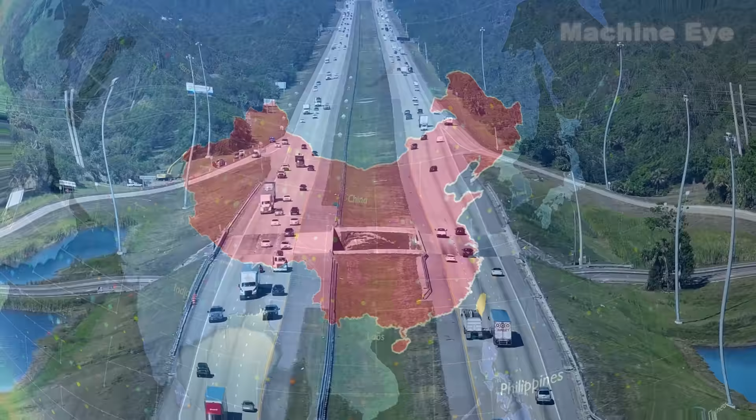In the United States, when people talk about infrastructure, what often comes to mind are icons like the Golden Gate Bridge or the aging yet vital interstate highways that still keep the country moving. But halfway across the world, in China, a different kind of infrastructure story is unfolding, one defined by jaw-dropping speed, sheer scale, and world-shaping ambition. China's engineering achievements are not only transforming the nation's own development map, but also quietly rewriting the rules of global infrastructure. Today, we're taking you deep inside this story to uncover the secrets behind China's rise as a global infrastructure powerhouse, and to witness the extraordinary legacy it's building in steel, stone, and ambition.

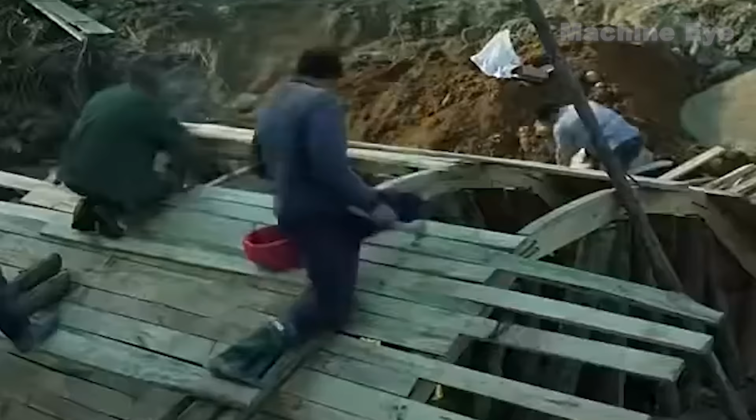When the People's Republic of China was first founded, the country's infrastructure was practically non-existent. The railway network was limited and outdated, with old equipment and low technical standards. Most roads were made of dirt or gravel, and many remote regions weren't connected by any roads at all. Bridge construction lagged far behind, unable to meet even the most basic transportation and economic needs. But the Chinese people have always carried a deep resilience and a determination to build a better future.

While many Western nations remain stuck in debates over whether to renovate or replace aging infrastructure, and often hesitate to take on major projects due to soaring costs and technical complexity, millions of Americans hitting the road will cross bridges and roadways in dire need of improvement and repairs. Getting to your destination likely won't be easy. Expect traffic jams, because decades-old bridges and roads weren't built to handle today's traffic.

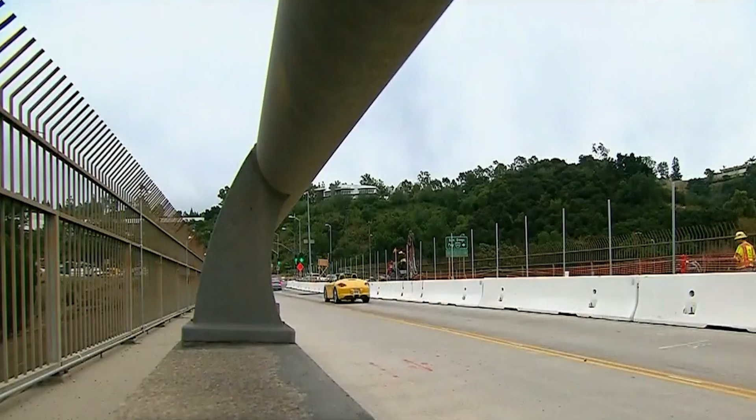The American Society of Civil Engineers once gave the nation's infrastructure a grade of D+. And that's more than just a letter, it's a warning sign for everyday commuters. A looming crisis is quietly unfolding. More than 1 in 9 bridges across the United States has been classified as structurally deficient. Many roads are severely outdated and simply can't handle the overwhelming traffic volumes of today.

Former U.S. Transportation Secretary Anthony Foxx put it bluntly: if we fail to invest in and maintain our aging roads and bridges, the American people will pay a heavy price. It's not just about safety. An estimated 1 million jobs are also at risk.

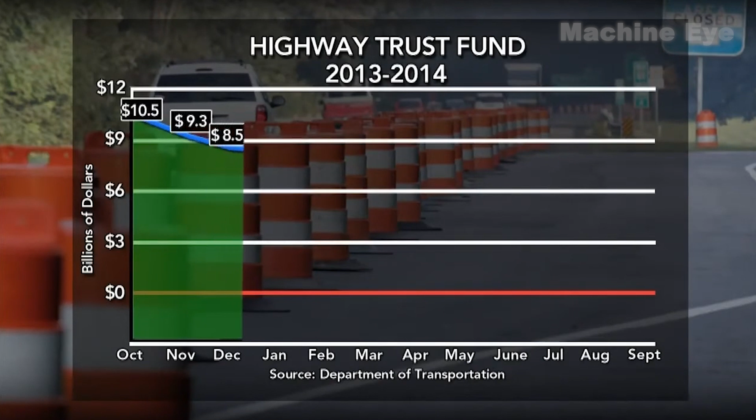Studies reveal a startling economic impact. Traffic congestion alone costs the U.S. over $20 billion annually in wasted fuel. On average, each driver loses more than $8,000 every year, not just in dollars, but in time, productivity, and quality of life. Even more concerning is the Highway Trust Fund, the primary source of funding for transportation infrastructure. It's largely supported by an 18.4 cent per gallon gas tax, a rate that hasn't been adjusted for inflation since 1993.

The result? A critical funding shortfall that's only growing worse by the year. Although the United States is aware of these issues and shows a willingness to improve, it often chooses to maintain the status quo in the face of high renovation costs and complex interest struggles.

While the U.S. struggles to maintain what it once built, China is doing something different. It's moving forward, fast. With astonishing speed and creativity, China is breaking world records again and again, reshaping its economy, its geography, and perhaps even the global balance of development.

This kind of efficiency and innovation was on full display during the 2015 reconstruction of Beijing's Sanyuan Bridge. In Beijing's vast transportation network, Sanyuan Bridge is a critical hub. Built in 1984, it's a diamond-shaped interchange located at a key traffic junction. Every day, it carries an enormous volume of vehicles. At peak hours, up to 13,000 cars pass over the bridge each hour. 48 bus lines run through it, serving an average of 727,000 passengers daily.

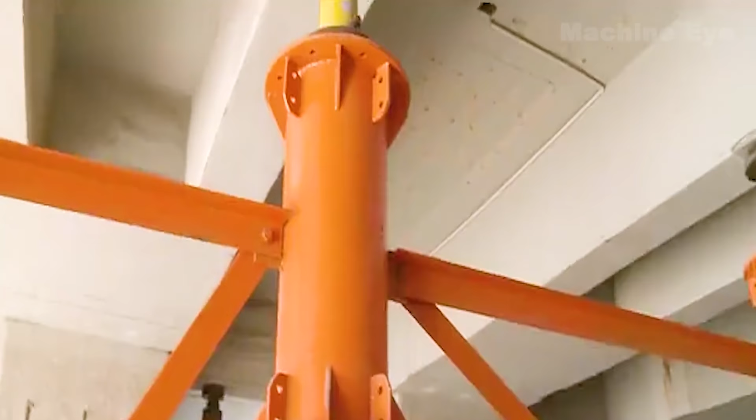After decades of intense use, serious structural problems emerged. The main beams and deck panels had deteriorated significantly, and the bridge's load-bearing capacity dropped to an unsafe level. In 2015, it was classified as structurally deficient. That November, Beijing launched a high-stakes renovation project. Under conventional construction methods, the project could have taken several months, causing major traffic disruption in one of the city's busiest corridors. But Chinese engineers had a different plan.

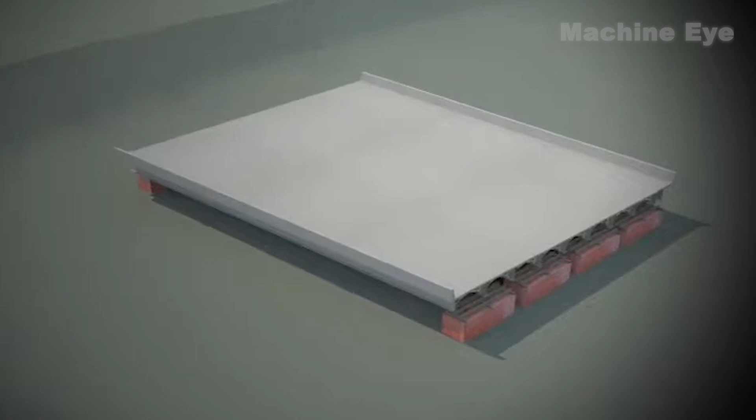They adopted a bold and innovative approach, replacing the bridge deck as a whole using a 1,000-ton integrated transport lifting machine. The old bridge deck, weighing 1,600 tons, had to be removed in 2 massive sections. The new deck, weighing over 1,300 tons, had to be transported and installed with centimeter-level precision.

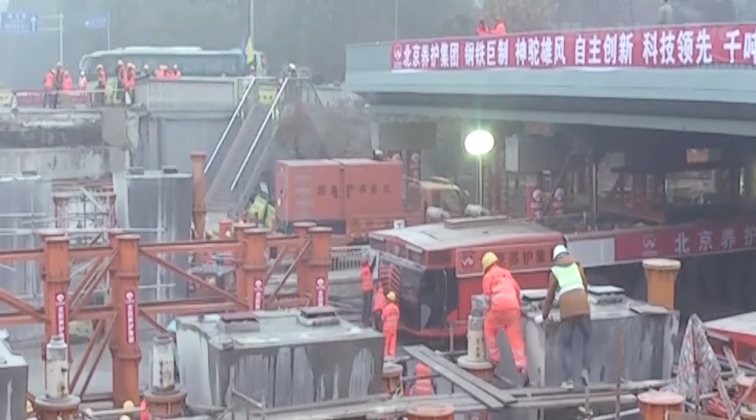The challenges were non-stop. Once work began, engineers found the old bridge in even worse condition than expected. Its concrete was badly damaged and structurally unstable, making safe removal in one piece impossible. The command team quickly switched to a contingency plan: on-site dismantling and segmented transport. Space at the construction site was extremely limited. There were multiple crews, large machines, high-precision demands, and the work had to be done during off-peak hours to avoid shutting down major roads.

Through the tireless efforts of over 1,000 workers operating in shifts, the impossible became reality. The entire reconstruction, from launch to reopening, took just 43 hours.

He said, all this has happened so fast, we haven't yet had time to be astonished. To remind myself how astonished I should be, I occasionally look out the window in my office in Cambridge at this bridge, which goes across the Charles River between the Kennedy School and Harvard Business School. In 2012, the state of Massachusetts said they were going to renovate this bridge.

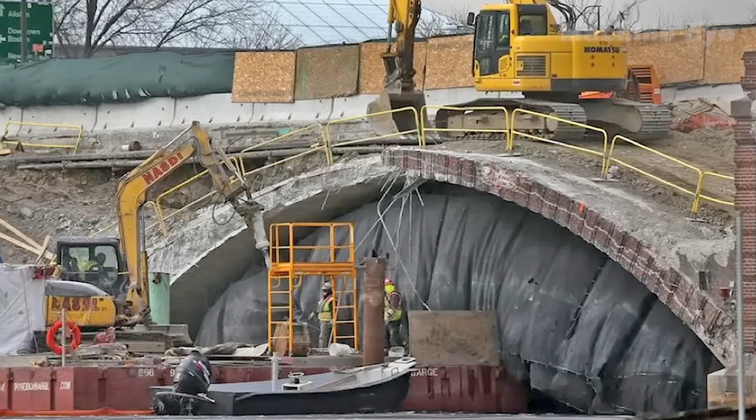It would take 2 years. In 2014, they said it wasn't finished. In 2015, they said it would take 1 more year. Then they said it's not finished. We're not going to tell you when it's going to be finished. Finally, last year, it was finished, 3 times over budget. Now, compare this to a similar bridge that I drove across last month in Beijing.

It's called the Sanyuan Bridge. In 2015, the Chinese decided they wanted to renovate that bridge. It actually has twice as many lanes of traffic. How long did it take for them to complete the project? What do you bet? Take a guess. Okay, take a look.

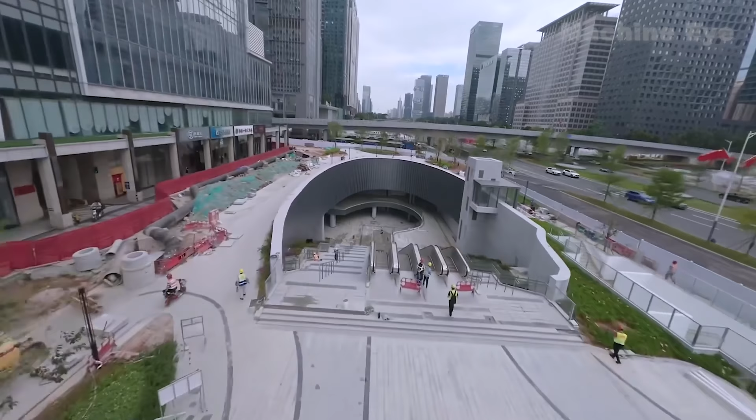From the artistic murals lining the transfer corridors to the smart navigation kiosks scattered throughout the stations, everything feels thoughtfully designed and incredibly user-friendly. Now follow my lens, and let's explore some of the most beautiful subway stations in China.

Then I flew back to New York, and reality hit me like a cold slap. The subway platforms here reek of mold and a strange mix of garbage and stale air. I've seen rats, I've seen old garbage, I've seen all types of stuff in the subway. I would say the grossest thing I've seen on subways is definitely human feces. The walls are covered in peeling paint and faded graffiti that look like they've been there for decades.

Rust-covered tracks are practically a highway for rats, and leaking ceilings drip steadily onto the already grimy floors. Inside the train cars, the seats are cracked and frayed, the windows spiderwebbed with scratches, and in the summer it feels like a sauna, while winter turns every ride into a freezing ordeal. No wonder people joke that New York's subway is a living historical artifact, while China's subway system is already racing toward the future.

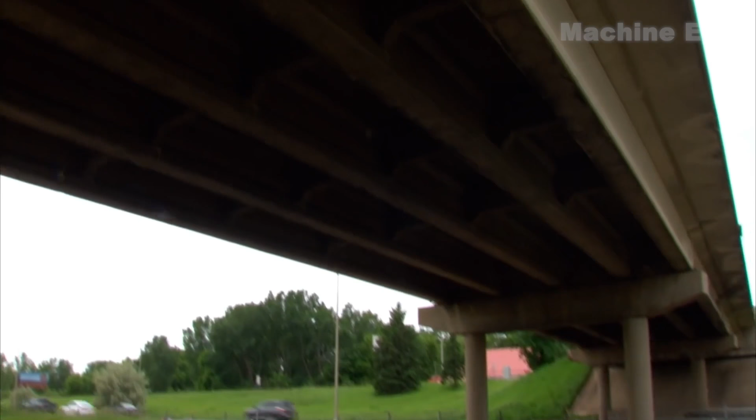This isn't an isolated case. Across the US, road conditions are in decline. According to the American Society of Civil Engineers, more than 40% of highways nationwide are rated as poor or merely mediocre. Aging roads have also led to increasing traffic congestion, adding an average of 54 extra commuting hours per year for American workers. The United States' performance in bridge infrastructure is also deeply concerning.

In March 2024, the Francis Scott Key Bridge in Baltimore, Maryland, collapsed after being struck by a ship. This bridge, built in 1977, was nearing the 50-year design lifespan typical of most bridges in the United States. According to a 2021 report by the American Society of Civil Engineers, approximately 42% of U.S. bridges have been in service for over 50 years, and around 12% are 80 years old or more, posing significant safety risks due to aging infrastructure.

In contrast, China's 43-hour bridge swap at Beijing's Sanyuan Bridge stands as a feat of engineering and efficiency. While the U.S. was once a global leader in infrastructure, it now faces chronic underfunding, lengthy decision-making processes, and strained local budgets, all of which hamper progress.

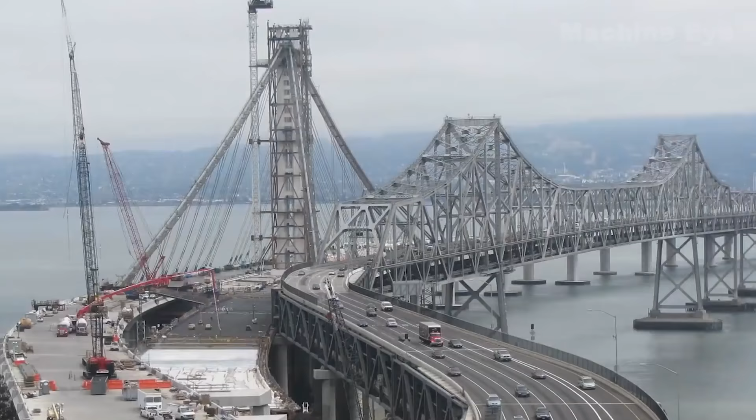In an attempt to reverse the decline of America's infrastructure, former President Biden signed the Infrastructure Investment and Jobs Act at the White House, hoping to revitalize the nation's infrastructure through this initiative.

Across our country right now, there are 45,000 bridges that are in poor condition. We're seeing photos of some of them behind me in all 50 states, and I've had a chance to see some of them myself as I've traveled the country. But about two-thirds of the bridges in need of repair in this country are considered off-system because they're not directly connected to the interstate highway system.

These are the bridges that are often overlooked when decisions are being made, but they are essential for small towns, rural towns, farmers to get their products to market, small businesses to be able to serve customers. These are the bridges that, when they're closed, shut off deliveries and routes to school, work, and home. They create longer delays for first responders when every second counts.

So we've included $27.5 billion for smaller bridges, including dedicated funding for those off-system bridges I just described. And because maintaining these bridges is often the responsibility of counties or towns whose budgets are stretched thin already, we decided to get rid of the requirement that counties or towns share in the cost. The federal government is going to pay for 100% of the cost for repairing these small bridges.

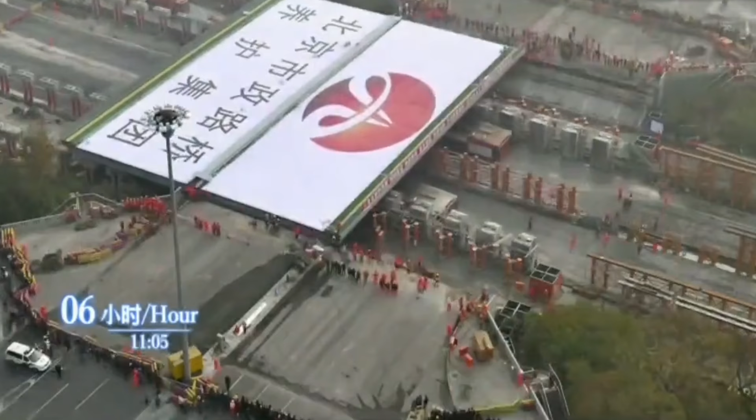America's golden era of infrastructure is fading into the past, while China charges forward, drawing a sharp and undeniable contrast. The Sanyuan Bridge project became more than just a construction story. It was a showcase of Chinese engineering skill, the power of Chinese speed and precision, and a statement to the world. When it comes to infrastructure, China isn't just catching up, it's setting the pace.

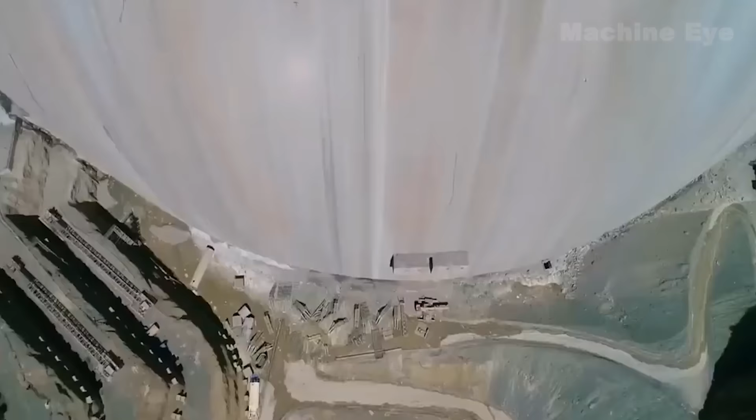From the world's largest high-speed rail network, spanning over 42,000 kilometers, to the record-breaking Hong Kong-Zhuhai-Macau Bridge that links three major cities across the sea. From the Sichuan-Tibet Railway cutting through the treacherous Hengduan Mountains, to the breathtaking Beijing-Daxing International Airport with its Phoenix-inspired design. Through sheer ambition and engineering excellence, China has redefined what it means to be an infrastructure giant.

Now, another monumental project is steadily advancing: the Pinglu Canal. This colossal undertaking is ushering in a new era of construction and national development on an unprecedented scale. In the towering mountains of southwestern China, engineers are carving a massive 135-kilometer canal, cutting straight through rugged terrain to give landlocked cities in Guangxi direct waterway access to the South China Sea. This isn't just about digging a ditch. This is a bold gamble to reshape the region's economic lifeline.

It's called the Pinglu Canal, and it's being hailed as the artery of the century. Right now, it's turning this once unthinkable plan into reality. The scale of excavation is nothing short of staggering.

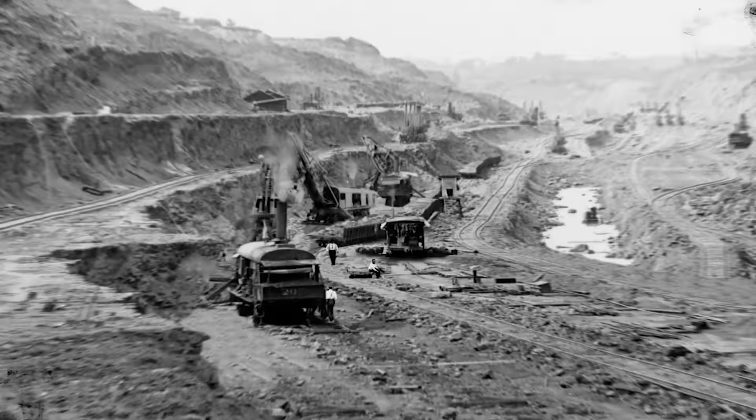Over 340 million cubic meters of earth and rock are being moved, the equivalent of shaving down entire mountain ranges. That's 3 times the excavation volume of the Panama Canal. At one of the most challenging sections, the Madao watershed, engineers are dealing with a 30-meter elevation difference, blasting through rock and flattening channels like performing surgery on the earth itself.

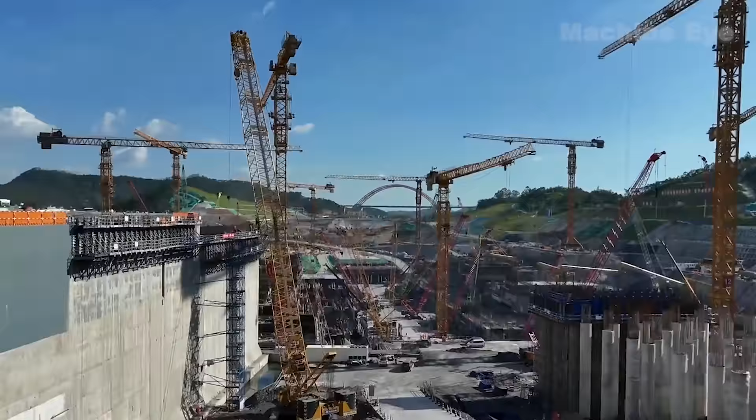But once they confirmed it was a real project, the tone changed. 'This is master-class engineering. This is how you make a nation great, not by slogans, but by building something that speaks for itself.' A German viewer marveled, 'I'm speechless. Where is this exactly? I'd love to visit someday.'

When people learned that the canal is expected to be completed by 2026, the comment sections lit up with comparisons. An Australian joked, 'This would take us about 400 years to finish down here.' And an American chimed in, 'On a construction site here, we have 20 workers. 1 works and 19 supervise.'

The contrast with China's construction efficiency couldn't be more stark. A Dutch hydraulic engineer named Jan commented, 'Coming from a country that has lived with water all its life, I've never seen something this wild and precise at the same time.'

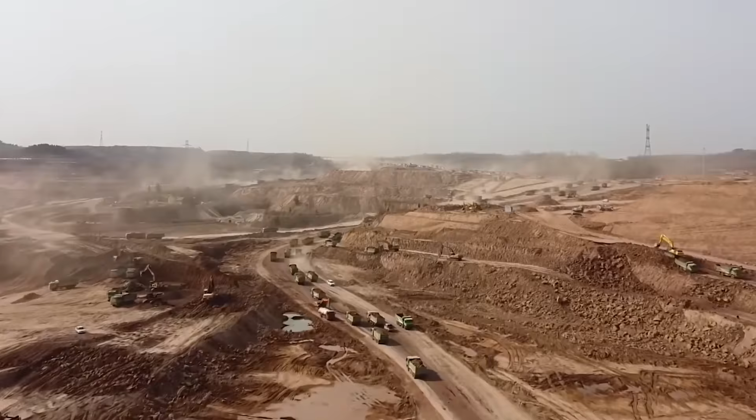Meanwhile, a US viewer wrote, 'Our infrastructure proposals are still stuck in Congress. China's out here slicing the continent in half with a canal. I surrender. That's execution.' If the Pinglu Canal is China's way of rewriting legends into the land, then the Sichuan-Tibet Railway is about challenging the limits of engineering on the rooftop of the world.

Spanning 1838 kilometers and reaching altitudes of up to 4,400 meters, the railway must cross 14 seismic fault lines, making it one of the most difficult rail projects ever attempted on Earth.

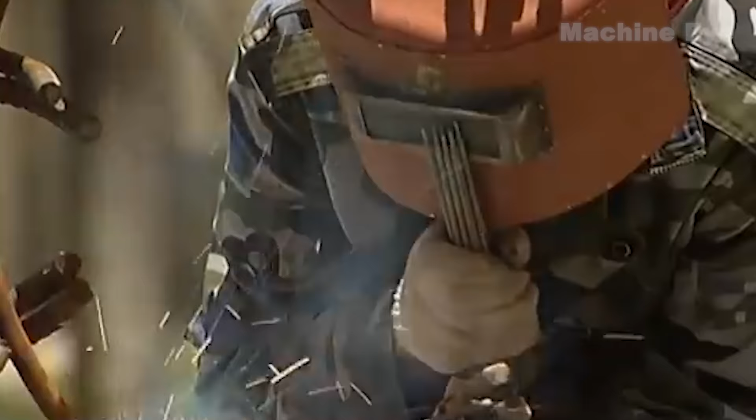To solve the challenges of building on permafrost in high-altitude regions, Chinese engineers developed an innovative thermal siphon cooling system. By harnessing the principle of ammonia's thermal expansion and contraction, the system draws underground heat away, keeping the frozen soil layer stable. For bridge construction in these harsh environments, they use lightweight alpine steel structures that are 30% lighter than traditional steel, yet strong enough to withstand Category 12 winds and magnitude 8 earthquakes.

During the construction of the Erlang Mountain Tunnel, workers wore oxygen tanks on their backs and used pneumatic drills to chip away at the solid rock, inch by inch, enduring temperatures as low as -20 degrees Celsius. They went on to set a world record, advancing 350 meters in a single month under such extreme conditions.

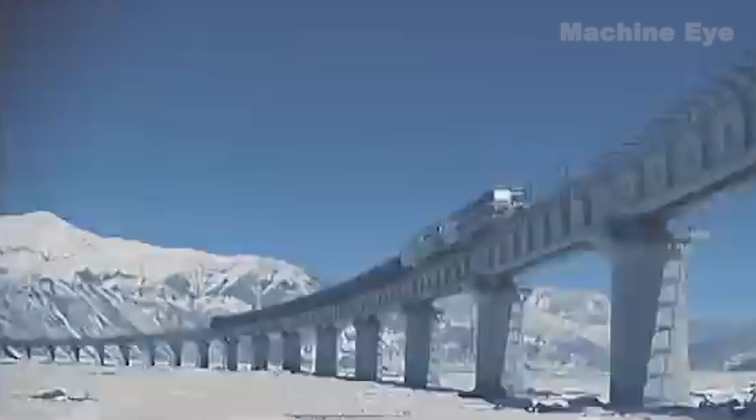The completion of the Sichuan-Tibet Railway will dramatically improve connectivity between Tibet and the rest of China, boosting economic development, cultural exchange, and helping lift communities along the road out of poverty. Railway enthusiasts across the West have praised it as a monumental victory of mankind over nature. Some even called it a miracle built in one of the most impossible environments on Earth.

However, certain Western media outlets and commentators have painted a different picture. Some labeled the railway one of the most expensive projects in the world, implying that China is overspending to show off. Others linked it to the 100th anniversary of the Communist Party, calling it a lavish political gift. There have even been rumors claiming the railway will destroy local traditions by flooding the region with tourists, or that the Chinese military might use it to threaten neighboring countries. But these claims are baseless, rooted in prejudice and jealousy, not facts.

Throughout the long and storied history of human engineering, tales of pain and sacrifice have never been absent.

In the 1930s, during the construction of the Hoover Dam in the United States, 120 lives were lost to the cold grip of concrete, and countless more were injured. At the Panama Canal, tens of thousands of workers perished, 30,000 men, claimed by the deadly combination of tropical disease and grueling labor under the sweltering jungle heat.

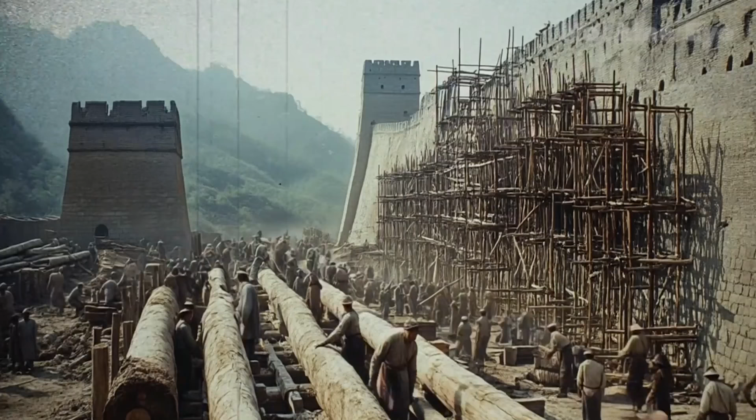Looking further back, China's Great Wall, winding across the mountains for thousands of miles, was built atop an immeasurable human cost. Buried beneath the earth and stone are the silent remains of those who gave their lives, whispering stories of suffering beneath each brick and battlement.

But with time, the meaning of engineering has evolved. In modern-day China, the principle of people first, life above all, has become central to every project. Every life is treated as invaluable.

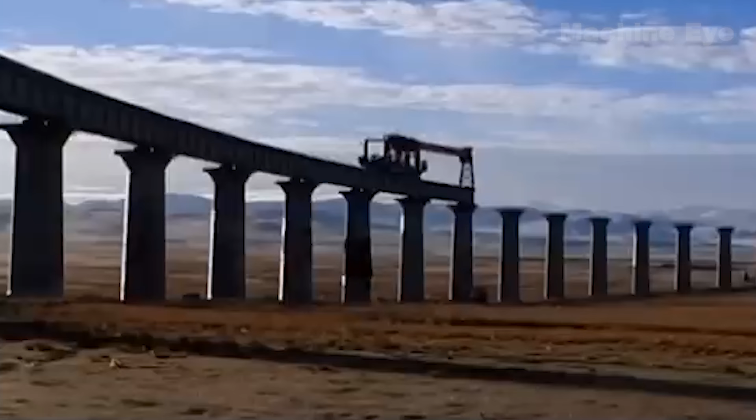This deep respect for human life was fully embodied in the construction of the Qinghai-Tibet Railway, the world's highest altitude rail line, built across the Tibetan Plateau at an average elevation of 4,000 meters. As soon as construction began on this sky road, it presented an unprecedented challenge to the nation's medical and safety systems. In this forbidden zone of life, where thin air and sub-zero temperatures can silently claim a life within moments, even a single breath carried potential danger.

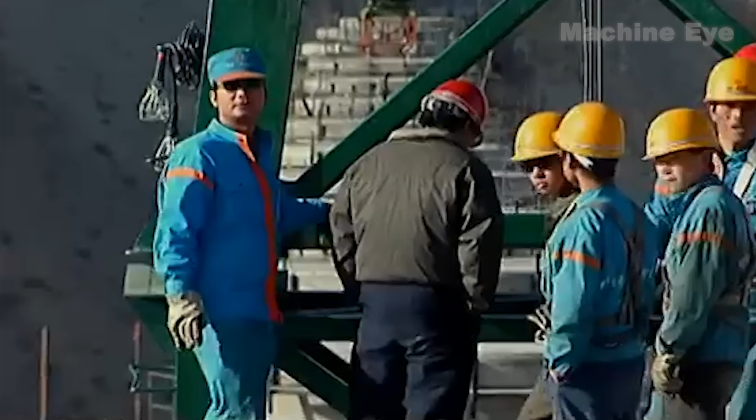But Chinese builders did not choose to push forward at the cost of lives. Instead, they drew a line of defense with science, planning, and care. On a site with over 200,000 workers, medical teams were stationed throughout every stage of the project. Portable oxygen generators, mobile treatment units, regular health checkups, and emergency response systems were deployed to every work zone. Every protocol reflected a commitment to life, every detail a testament to the value placed on human dignity.

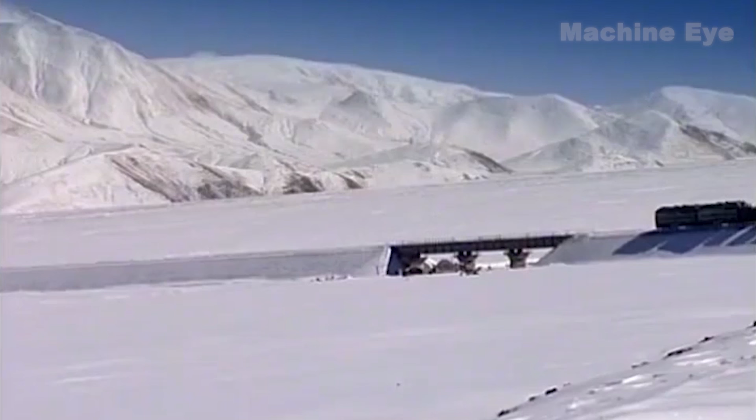In the end, China not only conquered 3 world-class engineering challenges, permafrost, extreme altitude, and fragile ecosystems, but also achieved a miracle in safety: 0 deaths from altitude sickness. This wasn't just a victory for engineering. It was a living demonstration of a core belief that no achievement is worth more than a single human life, and that even in the pursuit of national development, China will never compromise on protecting its people.

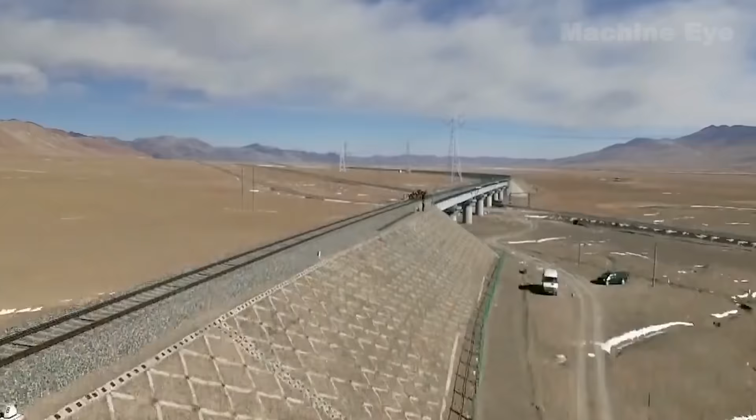The construction of the Qinghai-Tibet Railway is widely regarded as one of the greatest feats in the history of global railway engineering. However, during its development, some Western media outlets went to great lengths to exaggerate claims of casualties during the project, attempting to distort the true meaning and significance behind China's efforts in building this monumental railway. Their coverage was often laced with sarcasm and suspicion, as if struggling to accept that China had managed to complete a project of such extreme technical and geographical difficulty.

Some foreign netizens also echoed false narratives. One South Korean commenter even claimed that if Korea had built this railway, it would have taken half the time, while also alleging that over 3,000 workers died from altitude sickness. But the truth tells a very different story.

During the first phase of the Qinghai-Tibet Railway, it's true that China faced harsh environmental conditions and lacked the advanced resources we have today. According to official data, 179 workers lost their lives, and 633 were injured during this early stage, when engineers had to battle severe permafrost, high altitude, and extreme weather with limited technology.

But by the time construction of the second phase began in 2001, the situation had changed dramatically. China's financial, technical, and medical capabilities had all improved significantly. Participating construction firms implemented comprehensive health and safety systems to protect every worker involved.

Dr. John West, Vice President of the International Society for High Altitude Medicine, described the Golmud Lhasa section of the railway as one of the most challenging high-altitude projects ever built, comparable, in his words, to the Great Wall of China in the sky.

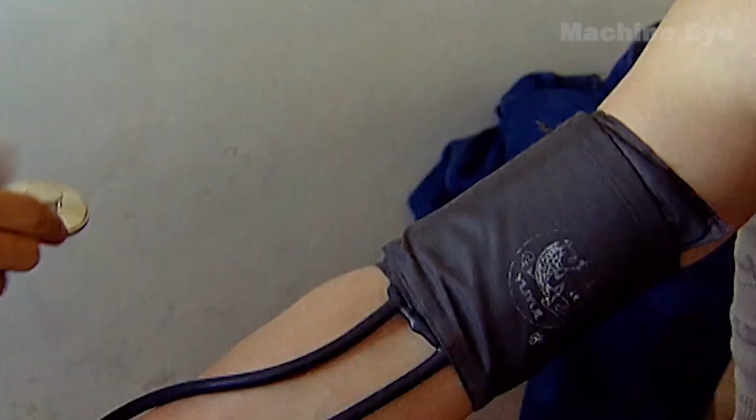China invested heavily in studying and treating acute and chronic altitude sickness, building a full medical infrastructure around the project. They promoted on-site emergency care protocols, which dramatically reduced the incidence of deadly conditions such as high-altitude cerebral edema and pulmonary edema. Over 5 years of continuous construction, more than 100,000 workers took part in building the railway, and not a single life was lost due to altitude-related illness.

This shocked even Western medical experts. A Chinese Academy of Engineering academician later pointed out, when the project reached elevations above 4,500 meters, we had 14,000 people working, and not a single death from hypoxia. Ironically, over 100 fatalities occurred due to car tire blowouts, not from altitude.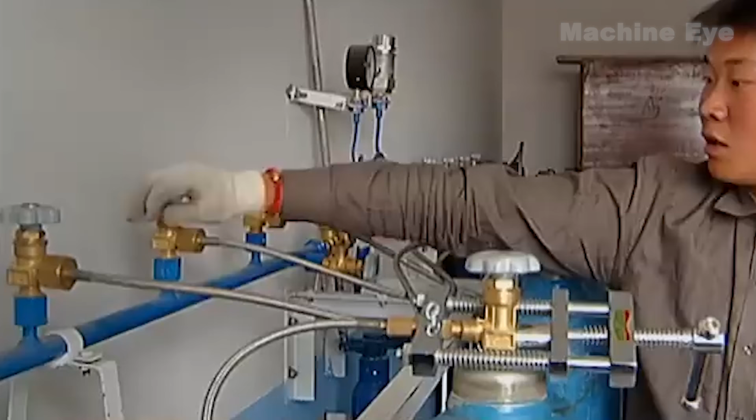To fight oxygen deprivation, construction teams deployed everything, from personal oxygen bags, to cylinders, to oxygen generation stations, and even hyperbaric chambers. Over the 5 years of Phase 2 construction, workers used up 600,000 oxygen tanks, a powerful symbol of how science and compassion came together to protect lives. The Qinghai-Tibet Railway was not just an engineering triumph.

It was a triumph of will, science, and deep respect for life. Those who try to discredit it with false claims are quickly silenced by the facts. This railway has become more than just a symbol of China's infrastructure strength. It represents humanity's victory in confronting the limits of nature without sacrificing human dignity.

Still, some Western media continue to label the project as a political stunt. They claim it was built merely to elevate China's leadership image, ignoring the deeper purpose behind it: to promote regional development, connect remote areas, and foster national unity. In one article, the New York Times argued that the railway would accelerate Han-led economic development in Tibet and claimed it would choke the region's ancient spiritual civilization. They even warned that the railway might further accelerate the migration of Han Chinese into Tibet, calling it a tool

for state control. Some Western media even went so far as to claim that the Qinghai-Tibet Railway threatens the very existence of Tibetan and Buddhist culture. Tibetans' unique way of life will disappear. That was their warning. But what do you think?

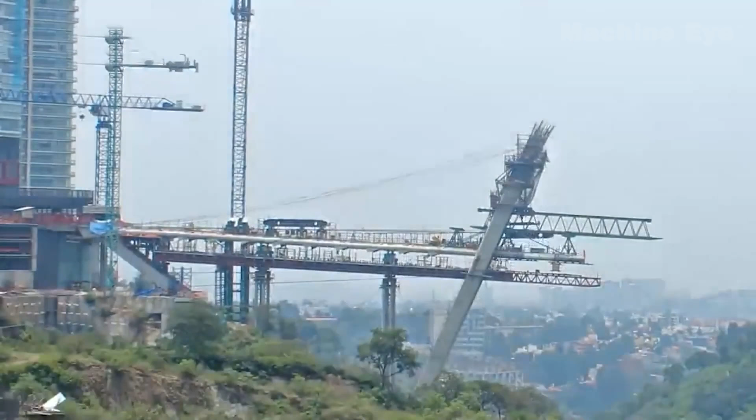Meanwhile, across the Pacific, China is rewriting the rules of infrastructure. In 2023 alone, over 10,000 bridges were built or rebuilt, some of them world-class megastructures that span entire seas.

The contrast in transportation infrastructure is even more striking. In New York City, the subway averages just 16 km/h, and delays caused by aging equipment are a daily occurrence. Meanwhile, China's high-speed rail network races ahead at 356 km/h, with a total length exceeding 45,000 kilometers, accounting for more than 70% of the world's high-speed rail mileage.

Take California's high-speed rail as an example. After 15 years of planning and debate, only a 190-kilometer stretch has been completed, with costs ballooning from $33 billion to over $128 billion. In contrast, China builds comparable rail lines in 40% less time and at 30% lower cost, without compromising quality or safety.

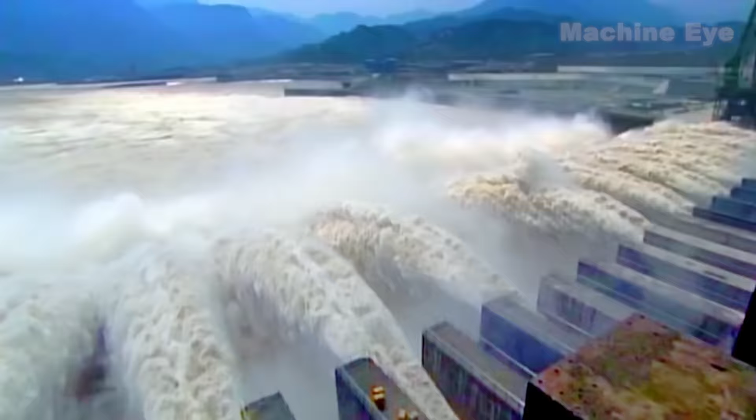The gap is just as visible in energy infrastructure. In parts of the U.S., aging power grids struggle to withstand extreme weather, often resulting in widespread blackouts. Meanwhile, China has built the world's largest clean energy system. Just one facility, the Baihetan Hydropower Station, can supply electricity to over 40 million households.

While the U.S. is still debating pipeline repairs, China has already completed thousands of kilometers of natural gas and oil pipelines, meeting the world's highest technical and construction standards. Behind these numbers lies a fundamental difference in development models. In the U.S., infrastructure projects often stall amid lengthy approval processes and political gridlock. In China, powerful coordination, homegrown engineering innovation, and a long-term vision turn blueprints into reality at scale and speed.

Want to know how these engineering miracles come to life? Let's dive into the construction front lines of some of China's most awe-inspiring projects, like the Deep Earth Take 1, the Shenjiang High-Speed Railway Tunnel, and the Changtai Yangtze River Bridge, and see what the future of infrastructure really looks like.

In today's global infrastructure landscape, China is redefining what's possible, building at a speed and scale that is simply breathtaking. While many nations struggle to repair or upgrade aging infrastructure, China has launched a sweeping infrastructure revolution, reshaping geography and transforming lives through one mega project after another.

In the remote Tarim Basin of Xinjiang, the roar of drilling machines never stops at the Deep Earth Taklamakan 1 well. This is no ordinary project. It's a direct challenge to the Earth's limits.

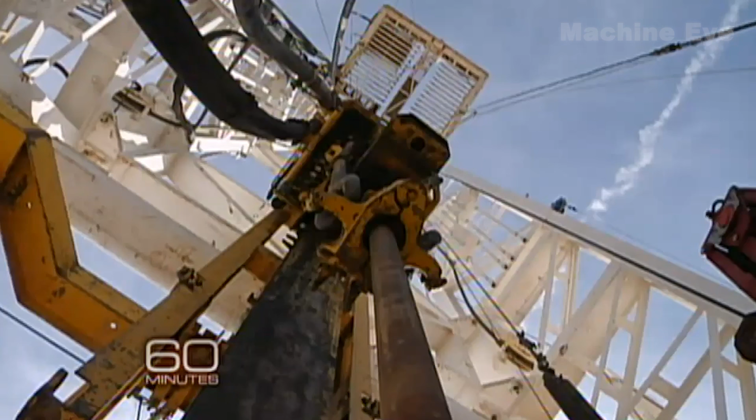While shale gas drilling in the United States hovers around 3,000 meters, Chinese engineers, using an entirely domestically developed automated rig, have pushed the drill bit to a staggering 10,910 meters below ground. This makes the Taklamakan 1 well the deepest in Asia and the second deepest scientific borehole in the world. It also marks a historic breakthrough in China's deep earth exploration capabilities.

Engineers faced extreme heat, pressure, and complex geological formations, yet they overcame these with relentless innovation. Every meter drilled pushed the boundaries of what humans can achieve.

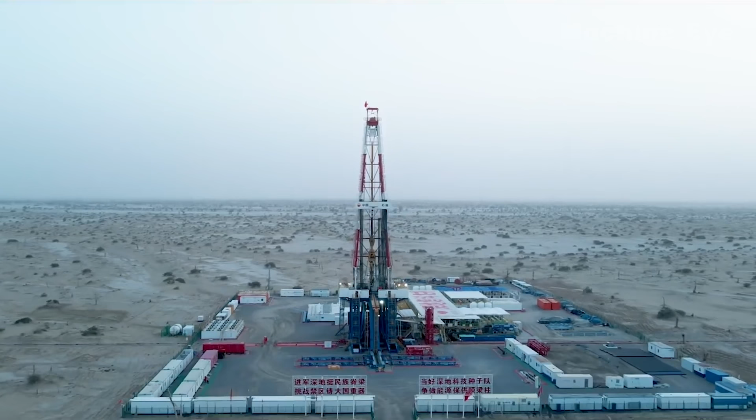It is said that after drilling 9,000 meters underground at the Deep Earth Take 1 well, Chinese engineers broke through rock layers that date back 500 million years. They then converted seismic waveforms from 9,000 to 14,000 meters below the surface into audible frequencies, allowing us to hear the sounds from deep within the Earth.

Meanwhile, under the Pearl River estuary, the construction of the Shenjiang High-Speed Railway Tunnel is just as intense. At a depth of 106 meters beneath the seabed, the massive Shenjiang tunnel boring machine is advancing at a steady 15 meters per day. This project has already broken records, becoming the deepest shield tunneling project in the world for high-speed rail.

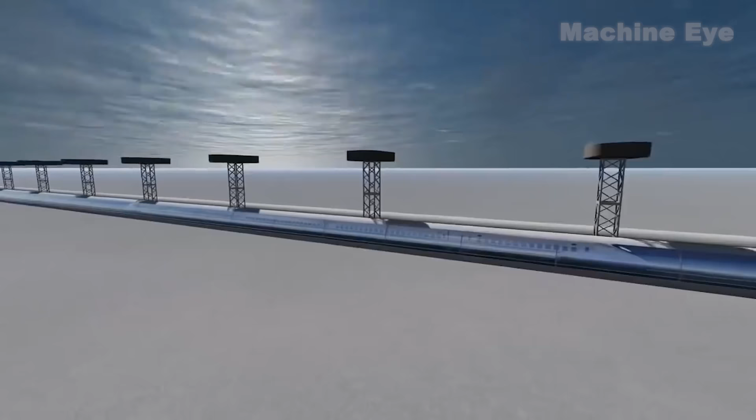While New York's century-old subway tunnels often experience delays due to aging infrastructure, China has reached a 100% localization rate for TBM technology. From design and manufacturing to deployment, every step is domestically driven.

This tunnel not only broke depth records, but also set 5 global engineering benchmarks, including breakthroughs in cable imaging and tailpipe grouting. These advances have significantly improved construction efficiency, safety, and reliability. Even the New York Times couldn't help but express amazement.

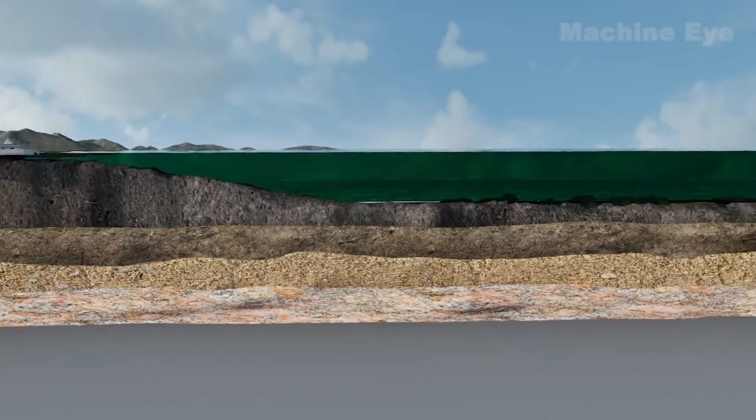In the Pearl River estuary, Chinese engineers connected 6.7 kilometers of undersea tunnel segments with a margin of error of just 3 millimeters, like assembling Lego blocks in the middle of the Pacific Ocean. Meanwhile, Boston's Big Dig overran its budget by 220% and resulted in a fatal ceiling collapse.

Now shift your view to the Yangtze River, where the Changtai-Yangtze River Bridge is rewriting engineering history. Its 350-meter-tall cable-stayed tower, equal to a 115-story building, is now the tallest of its kind in the world. But it's not just the height that impresses.

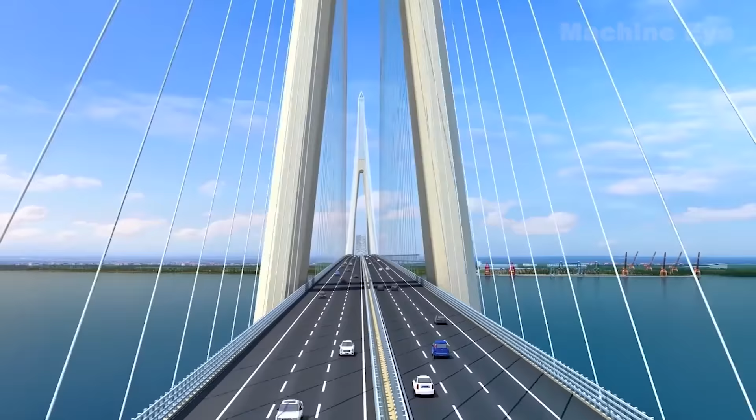The bridge's innovative flat-deck design integrates high-speed rail, expressways, and local roads all on a single level, maximizing efficiency and minimizing land use. The main waterway bridge of this river-crossing channel is a cable-stayed bridge with a main span of 1,208 meters.

While both Tianxingzhou Channel Bridge and Luzhou Channel Bridge use a steel truss arch bridge with a main span of 388 meters. Its average area is approximately 5,400 square meters, which is the size of 13 basketball courts.

The underwater foundation for the tower piers of the bridge uses 23,000 tons of steel. That's the steel of 3 Eiffel Towers.

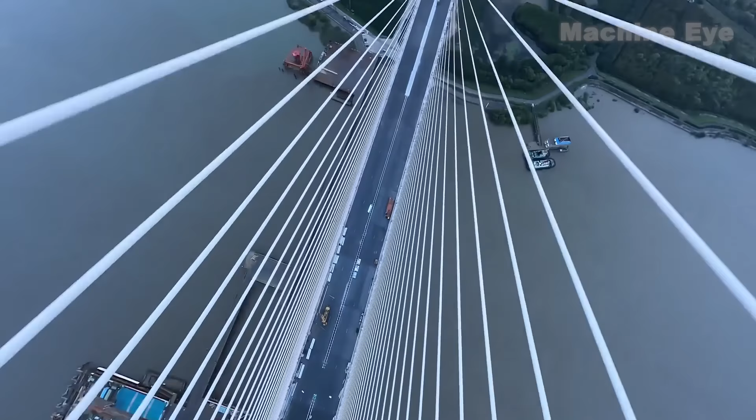Engineers faced enormous challenges, such as maintaining vertical precision for ultra-tall towers and hoisting enormous steel beams across vast spans. Yet, through cutting-edge techniques and bold innovation, these obstacles were conquered.

In stark contrast, California's high-speed rail project remains mired in cost overruns and technical delays. China, by comparison, is completing similar projects 40% faster and at 30% less cost, thanks to its powerful industrial base, streamlined coordination, and decades of accumulated engineering expertise.

But these mega projects are just part of the picture. China's infrastructure miracle is also evident in its expanding transportation network. As of today, China's high-speed rail network has surpassed 25,000 miles, more than 70% of the global total.

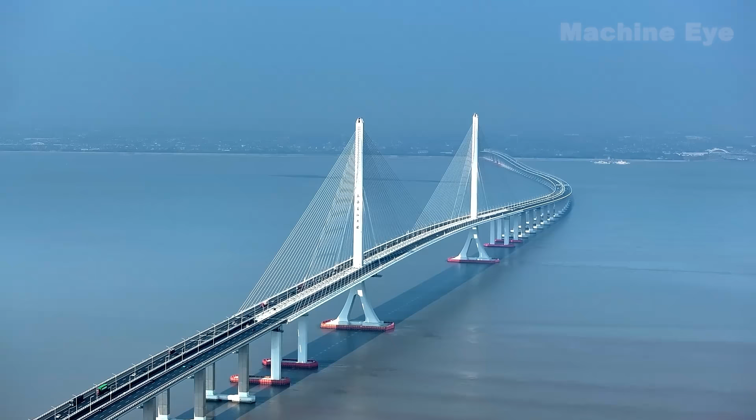From the icy plains of Harbin to the tropical shores of Sanya, from coastal megacities like Shanghai to the high-altitude plateau of Lhasa, this network crisscrosses the country like a web of steel dragons, uniting cities and boosting regional economies. These rail lines have dramatically reduced travel times and improved quality of life, while also driving regional economic integration.

Throughout the process, engineers have tackled an array of extreme challenges: Arctic cold, searing heat, fragile ecosystems, deserts, and more. For example, the Qinghai-Tibet Railway posed 3 world-class challenges: high-altitude hypoxia, permafrost, and environmental fragility.

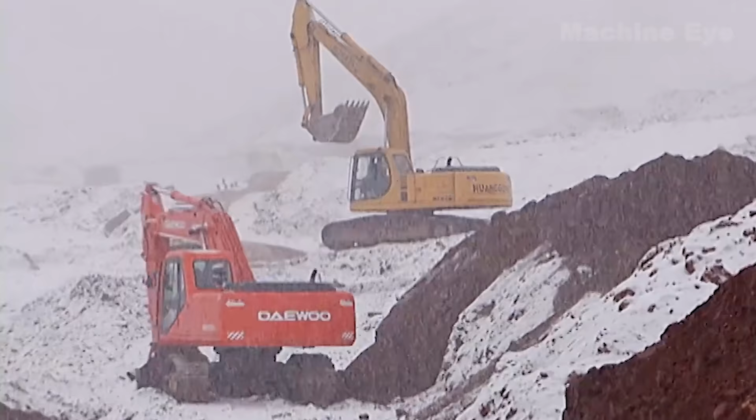Chinese engineers responded with pioneering solutions like elevated bridges in place of roadbeds, ventilated stone foundations, and thermal stabilizing rods, ensuring the safe and sustainable operation of one of the most remarkable railways on Earth.

China's bridge building capabilities are equally remarkable. Beyond the Changtai-Yangtze River Bridge, a growing list of world-class bridges continue to break records. For instance, the Beipanjiang Bridge, with a vertical clearance of 565.4 meters from deck to riverbed, holds the title of the world's highest bridge.

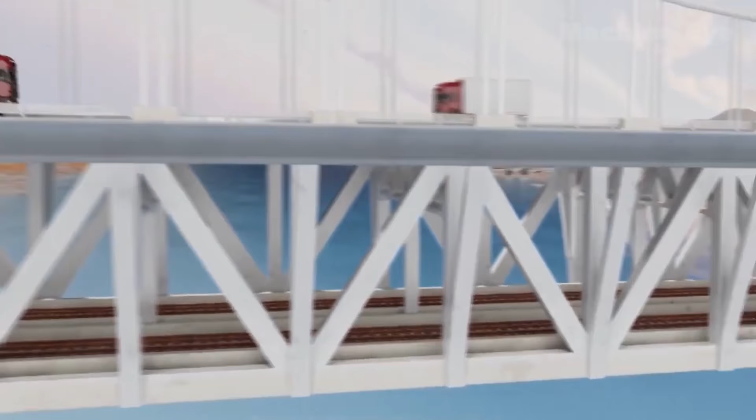The Hutong-Yangtze River Bridge, spanning 1,092 meters, is the world's first cable-stayed bridge combining both railway and highway functions with a span exceeding 1 kilometer.

The construction of these bridges not only demonstrates China's world-leading expertise in bridge engineering, but also reflects the spirit of bold innovation and technical ambition among Chinese engineers.

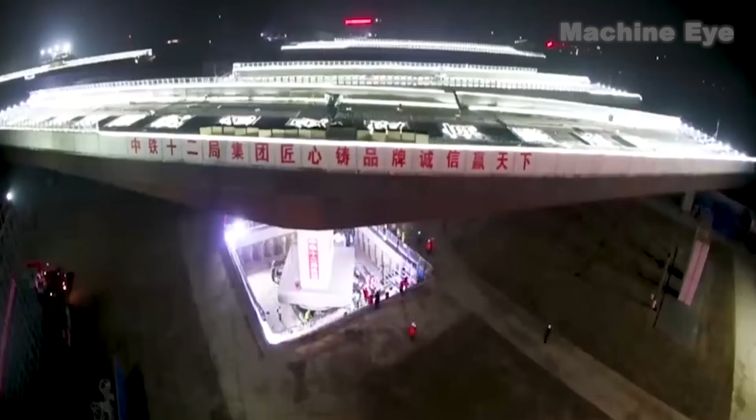In these projects, China has adopted a variety of advanced structural designs such as suspension bridges, cable-stayed bridges, and arch bridges. It has also employed cutting-edge construction methods, including prefabricated assembly, incremental launching, and bridge rotation. These techniques have significantly improved construction efficiency and quality across the nation.

From cross-sea bridges to hydropower giants, from high-speed rail networks to clean energy megabases, Chinese engineers are pushing boundaries again and again, turning the impossible into reality. They are building, quite literally, the backbone of a nation's rise. These projects show that China doesn't just export infrastructure, it exports a complete development solution.

Even the New York Times admitted Chinese infrastructure is reshaping the global economic order. So how is China defining the next century of human progress?

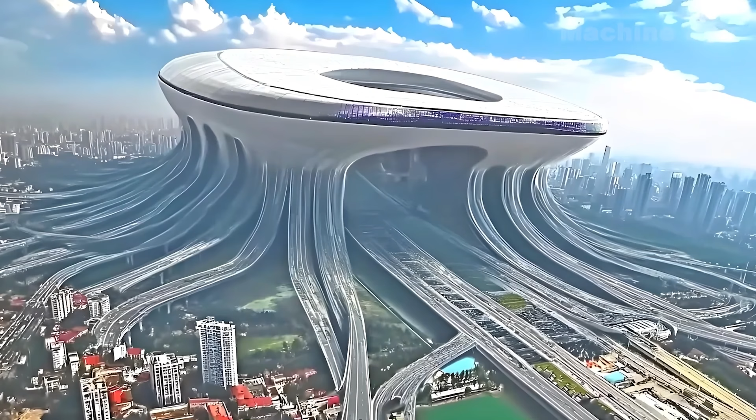While the US is still fixing highways from the last century, China is already exploring the ultimate future of infrastructure. As of 2023, China has built over 42,000 kilometers of high-speed rail, more than the rest of the world combined. To put that in perspective, if you connected all that track end to end, it would circle the Earth once. And it's not just about the numbers, it's about the speed of construction.

Take Beijing Daxing International Airport, for example. With a $12 billion budget and a terminal the size of 97 football fields, the entire project was completed in just 4 years. But this isn't just architecture, it's a national strategy designed to connect 1.4 billion people and energize the economies of all 34 provincial regions.

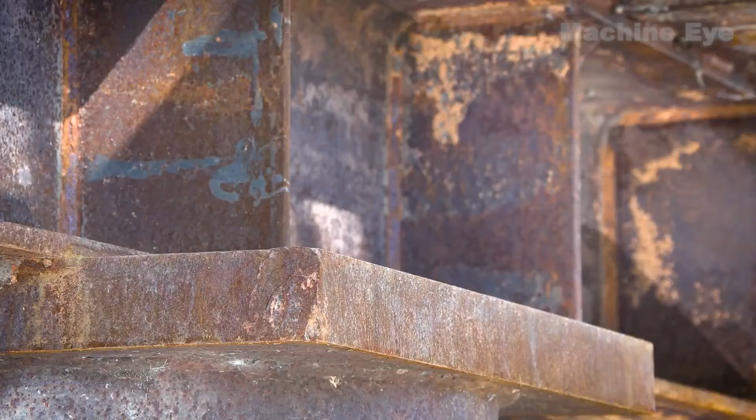In the US, the picture looks very different. According to the American Society of Civil Engineers, 65% of US roads are in poor or mediocre condition, and over 45,000 bridges need major repairs.

Roads and bridges are vital to the country. The ability to freely move goods, services, and people across our nation directly contributes to our economic place in the world. There's no question we're not making adequate investments in our transportation infrastructure. It's more expensive today to maintain what we have than it was to build it originally.

We're still driving on roads that my grandparents paid for and built. Our average bridge age is 75 years. Well, they were built to be 50-year bridges.

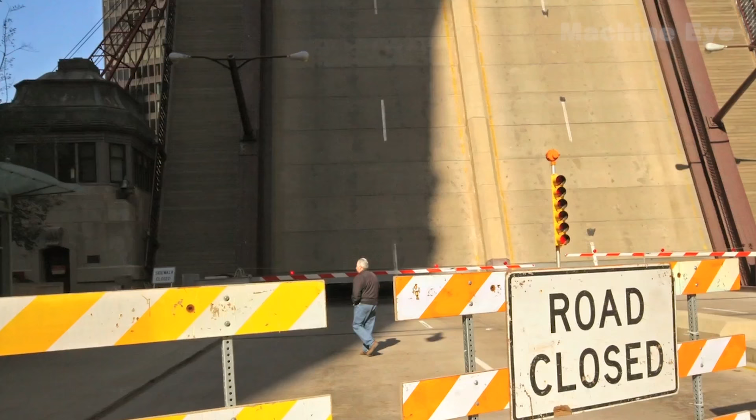One bridge that carries 90,000 cars a day, the nearest detour is an 11-mile detour. So if that bridge had to shut down, we'd be looking at 1 million miles a day of extra traffic while that bridge was shut down and being rebuilt.

The majority of our population lives in metropolitan areas, so our highways are greatly congested. When you have congestion problems, time is money, and that's money lost to that business that is trying to get their product to the marketplace. Same thing for a business person whose time is very valuable. We all work somewhere, and all of those jobs are dependent on that infrastructure working for us.

We need to make some more investments for the future. We have to look at the whole problem. We have been working for many, many years, over a decade, to bring down the current long structure of a bridge down to street level, to turn that into a boulevard.

And of course, the other side of that coin is if you don't invest in your infrastructure, and you do have bad roads, and you do have bad bridges, it doesn't help you with economic development. Meanwhile, China's road network quality ranks among the top 30 globally.

The difference is even starker in high-speed rail. While China's trains zip at 421 kilometers per hour, the US has no true high-speed rail network. It is shocking and incredible that the latest bullet train developed in China can reach an amazing speed of 603 kilometers per hour.

Amtrak's Acela, often called high-speed, tops out at just 240 km/h, and that's only on a short stretch between Boston and Washington, D.C. This gap in infrastructure doesn't just highlight differences in engineering capability, it reveals two completely different development philosophies and system advantages.

In the U.S., infrastructure has long been trapped in a vicious cycle: political gridlock, funding shortages, and delayed maintenance. Responsibilities between local and federal governments are often unclear, and interstate projects face endless red tape, leaving roads and bridges operating far beyond their intended lifespans, with little hope for timely repair.

We're going to start spending on infrastructure big, and not like we have a choice. It's not like, oh, gee, let's hold it off. Our highways, our bridges are unsafe. The federal government's role in infrastructure is fairly narrow to certain types of things: interstate highways, major roads, and bridges.

Infrastructure encompasses much more than that. It includes things like the electric grid, which is privately owned for the most part. It includes water and sewer lines, which are mostly owned by municipalities, local streets. Right now, some of the biggest needs are water and sewer systems in local governments.

Many of those places, like Flint, Michigan, they're very poor cities. If they raise water and sewer rates, it's going to be poor people paying them.

The president has said that not all of the $1 trillion will come from the federal government, that he would like to see private capital also contribute. So is there money in the form of private capital to help with the infrastructure needs in the country? The answer is absolutely yes. The question is, are there attractive returns? Because those investors have many places that they can invest their money.

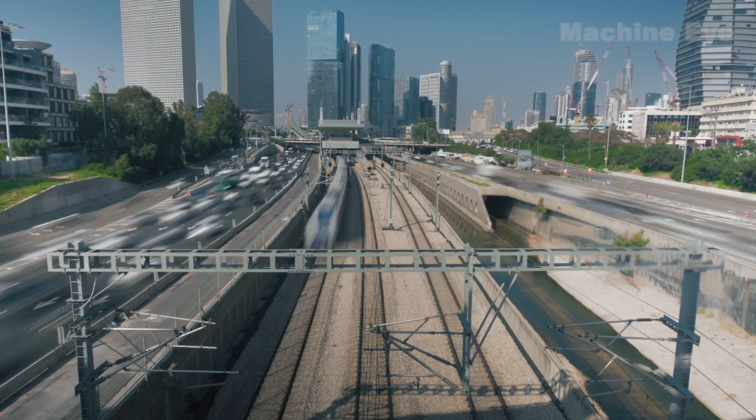What's even more worth noting is how infrastructure is quietly reshaping the economic development models of both nations. In China, the transportation network is deeply embedded into regional coordination strategies. High-speed rail isn't just about getting people from point A to point B. It's fueling industrial upgrades and population mobility along its corridors, helping major initiatives like the Chengdu-Chongqing Economic Circle and the Yangtze River Delta Integration Plan take root and thrive.

Meanwhile, in the U.S., aging infrastructure has kept logistics costs stubbornly high, limiting the economic potential of the Midwest and widening the gap between regions. The Department of Transportation estimates that the U.S. needs to spend at least $124 billion a year to keep roads and bridges in good condition. In 2010, all levels of government combined only spent $100 billion, $24 billion short.

This contrast reveals a deeper truth. World-class infrastructure isn't just a hard asset, it's also a form of soft power that defines national competitiveness. While China is already planning for intelligent railways and magnetic levitation trains, the U.S. is still stuck debating how to fix what's already broken. This generational gap in infrastructure development may have only just begun to show.

Cost is another major factor. China's Three Gorges Dam, the largest hydroelectric project in the world, was completed in just 17 years, made possible because it has an exceptionally large solid granite river valley. In the first segment of the river, about 1 million square kilometers of land has been taken under control, and the average amount of water passing through the river each year reaches 500 billion cubic meters. It is the world's most gigantic concrete structure.

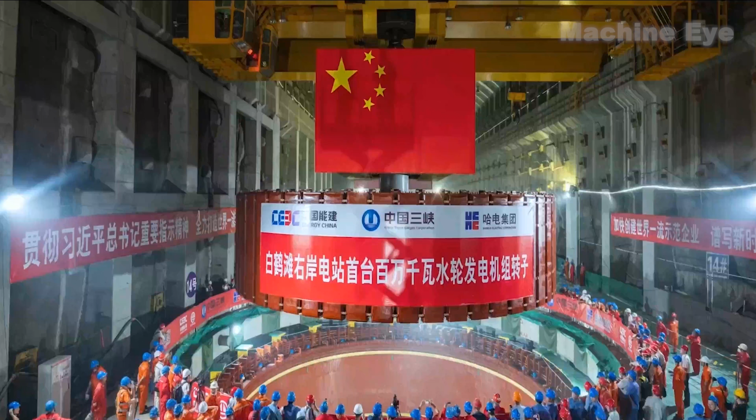It took 40,000 employees. They needed nearly 6 billion gallons of concrete and 463,000 tons of steel, enough to construct 63 Eiffel Towers. They installed 32 huge generators that weigh 6,000 tons each. With the activation of these 32 generators, the Three Gorges Dam has reached its full capacity. These 32 main turbines, each with a capacity of 700 megawatts, and 2 small turbines, each with a capacity of 50 megawatts, can generate enough electricity to run 15 nuclear reactors, providing energy for 60 million people. According to China, it cost $37 billion to complete the project.

Now compare that to California's high-speed rail. Back in 2008, it was originally budgeted at $33 billion. But today, the price tag has soared to nearly $128 billion. And after 15 years, only a small portion of the rail line is finished. So why such a massive gap? In China, centralized planning allows for faster land acquisition and streamlined approvals. In the U.S., infrastructure projects often get stuck in years of lawsuits, community opposition, and political gridlock.

What is the state of infrastructure in this country today? We are really falling behind and falling apart. Marcia Hale is with the bipartisan group Building America's Future, which raises awareness of the state of U.S. infrastructure. We've got a construction site right ahead of us here.

The American Society of Civil Engineers gave the U.S. a D+ for overall infrastructure this year after a comprehensive review that included the nation's roads, bridges, and waterways. Their solution? Invest an estimated $3.6 trillion by the year 2020. Our roads, our bridges, our schools. It is also time to rebuild our crumbling infrastructure. America, this is how we truly build back better.

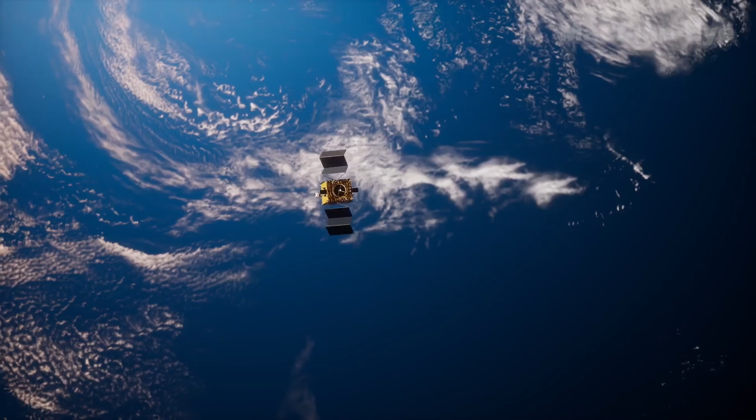China is also leapfrogging in tech. Their floating tunnels and 3D printing technology are pushing engineering boundaries, while U.S. infrastructure often relies on decades-old technology. For example, China's Beidou navigation system, a rival to GPS, powers smart infrastructure projects nationwide, from traffic management to disaster prevention. This means precision guidance systems cannot be controlled or jammed by the U.S. anymore.

The ICAO has now recognized China's Beidou navigation system as a global standard for civil aviation, which is more accurate than the American GPS. The fact is that the Beidou system has already been used worldwide and has an astronomical number of users. In the U.S., many cities still struggle to upgrade basic systems, like lead pipes and water supply networks. What drives these differences? It boils down to policy, funding, and culture.

China's 5-year plans allocate massive state funding to infrastructure, while the U.S. depends more on fragmented local budgets and private investment. Culturally, China values long-term planning, as seen in projects like the Belt and Road Initiative, which aims to connect Asia, Europe, and Africa over decades. In contrast, U.S. infrastructure often prioritizes short-term political goals, leading to delays and budget overruns.

Just a few years ago, the stock market's at 25,000. Corporate profits are the highest they've been in decades. The rich keep getting richer. And our friends on the other side said, what do we do now? Let's do a tax cut where 83% of it goes to the top 1% of the wealthiest people.

Fast forward a few months, global pandemic, 36 million people unemployed, 40% of families who have a worker that makes $40,000 a year and less lose their job last month. 4 million people didn't pay their rent, and the Republican Party says we don't have any money to help you. Are you kidding me? Where do you guys live? Food lines around the blocks at our food banks in the United States of America. 1 in 5 kids are going hungry. Your party can't even get food to them. This isn't a wish list. If it's a wish list, it's for the working class people.

So who's winning the infrastructure race? The answer isn't simple. China's rapid growth has raised concerns about environmental impact and debt risks, while the U.S. is finally investing billions in the bipartisan infrastructure law.

After years and years of infrastructure week, we're on the cusp of an infrastructure decade that I truly believe will transform America. The $1.2 trillion bill includes $550 billion in new spending, including $110 billion for roads and bridges, $25 billion for airports, and the largest federal investment in broadband ever, $65 billion.

All of this is extremely important and needed, with the biggest investment in bridges since the interstate system. With former Vice President Harris presiding, all 50 Senate Democrats voted to support the bill, along with 19 Republicans, including Minority Leader Mitch McConnell. It's a good day.

Elections matter. But the bipartisan spirit in the Senate was gone by lunchtime, with Democrats taking their first procedural vote on a separate $3.5 trillion budget bill packed with other priorities that they intend to pass in the face of united Republican opposition. This budget resolution is a dream for those who want to socialize America. It's a nightmare for working people.

But one thing's clear: the way these two giants build their futures will shape global economics, trade, and technology.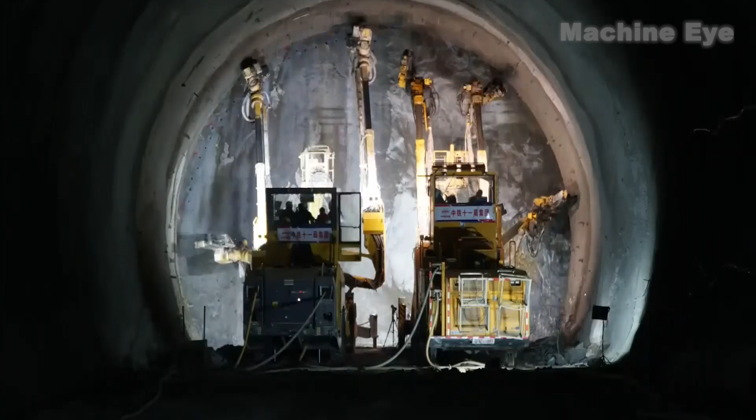To date, the project has transferred hundreds of billions of cubic meters of water, benefiting hundreds of millions of people, while effectively improving ecological conditions and the overall quality of life in the north. Throughout the construction process, engineers faced major technical challenges such as tunneling under the Yellow River and managing expansive soils. Yet through persistent research and innovation, Chinese engineers overcame these difficulties and ensured the successful completion of this national megaproject.

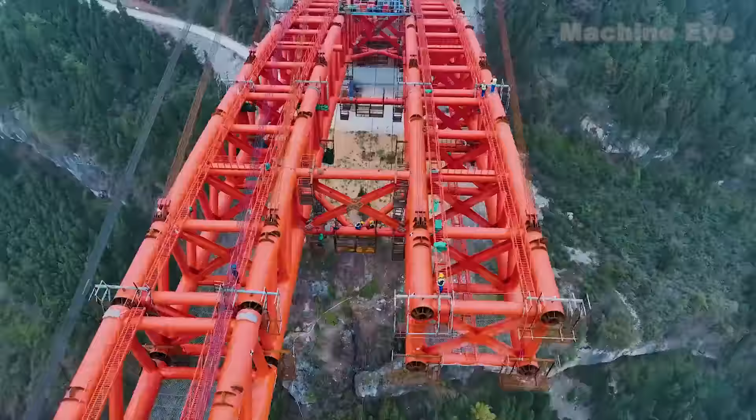China's rapid rise in infrastructure is no accident. Behind it, a deep foundation in science and technology and a vast reserve of skilled professionals. The country boasts a massive team of highly qualified researchers, engineers, and technicians who continuously drive innovation in the infrastructure sector. At the same time, China's industrial system powers the build, from cutting-edge materials to precision machines, delivering at scale.

In addition, China's infrastructure boom didn't happen by chance. It was driven by long-term government planning, strong policies, and massive public investment, one successful megaproject after another. Compared to the United States, China has demonstrated a unique set of advantages and growing competitiveness in infrastructure development.

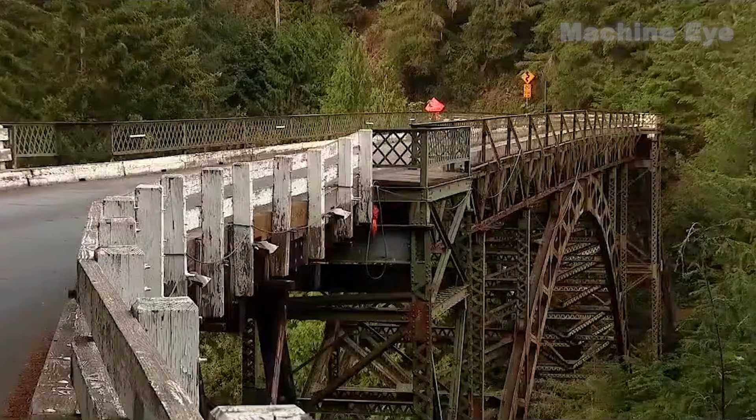While the U.S., once a pioneer in global infrastructure, now struggles with aging facilities, funding shortfalls, and bureaucratic delays, many of its roads, bridges, and railways are in disrepair and badly in need of upgrades. In contrast, China continues to invest heavily, accelerate innovation, and complete projects with unmatched speed and precision. Its infrastructure model not only supports robust domestic development, but also offers a valuable reference for other countries seeking to modernize their own systems.

And the story is far from over. The miracle of Chinese infrastructure continues to unfold. In the years ahead, China is poised to explore ever deeper underground engineering, expand transportation networks to new frontiers, and take on construction challenges in even more complex environments.

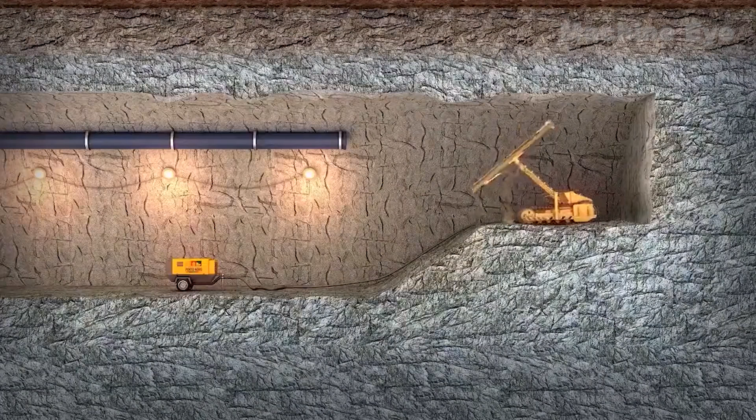With fearless determination and world-class technical expertise, China is reshaping the very definition of what human engineering can achieve, paving the way for a future that is stronger, smarter, and more interconnected than ever before.

Do you think China's model can work in other countries? Or does the US have an ace up its sleeve?

Imagine this. Beneath the roaring waves of the Lingdingyang Strait, 33 massive immersed tunnel segments, each as tall as an 8-story building and weighing 80,000 tons, had to be aligned and joined together with Lego-like precision. The margin of error? No more than 5 centimeters. The difficulty? Comparable to threading a needle through a moving aircraft carrier during a hurricane.

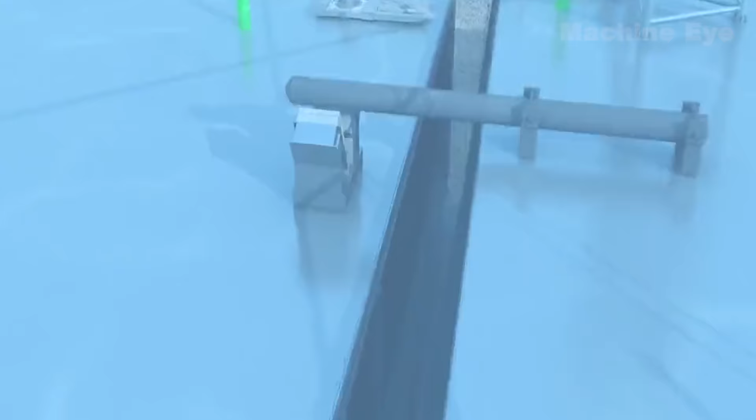This was the hell-level challenge Chinese engineers faced while building the Hong Kong-Zhuhai-Macau Bridge. John Smith, a member of the American Society of Civil Engineers, once said, 'Achieving millimeter-level precision in deep-sea immersed tube joints—we used to think that was impossible in the real world.'

Faced with such skepticism, even ridicule from overseas experts, Chinese engineers responded with quiet determination. Yes, the difficulty is unprecedented. Millimeter-level tolerance in these conditions is an enormous challenge, but that's exactly why we must do it. This is our responsibility as Chinese engineers. We will not be intimidated by mockery or doubt, and no technological blockade can stop our progress. We will stay on site, research day and night, and even if we fail thousands of times, we will never give up. And they didn't.

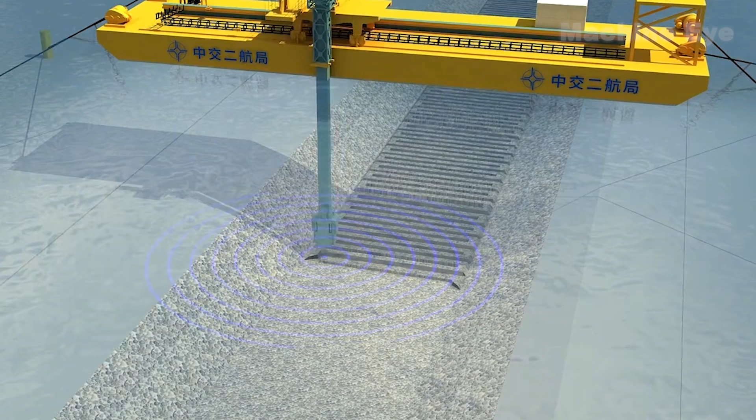Through relentless effort, they invented a technique called composite foundation treatment, injecting special materials into the seabed to turn soft silt into rock-solid support, capable of holding tens of thousands of tons. During testing, engineers worked 72 hours non-stop, failed 137 times, until they finally achieved a 300% increase in load-bearing capacity.

On May 2, 2017, during the connection of tunnel segments E29 and E30, a sudden tidal surge knocked them 3 centimeters off alignment. In that critical moment, China's self-developed dynamic hydraulic adjustment system kicked in, and within just 15 minutes performed a millimeter-level correction. This move didn't just save the project, it rewrote the rules of sea-crossing tunnel construction worldwide.

Today, the 55-kilometer-long Hong Kong-Zhuhai-Macau Bridge is not only the longest sea-crossing bridge in the world, it's a bold symbol of China's engineering prowess. Next, let's talk about water engineering.

The Hoover Dam was once a global icon of industrial might, its power output unmatched for decades. But today, China's Baihetan Hydropower Station has taken center stage. Its network of underground chambers stretches over 217 kilometers.

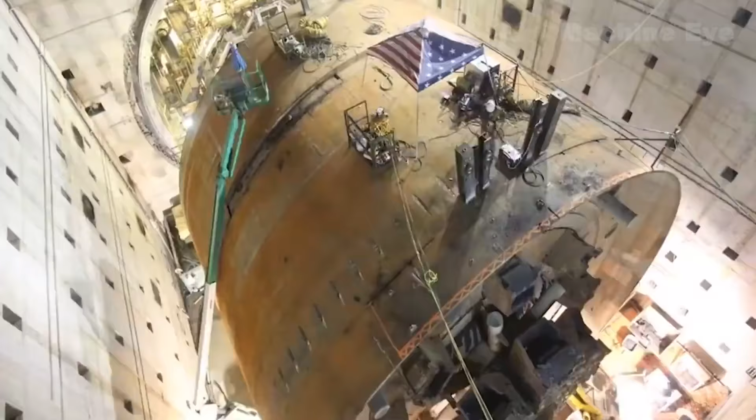Even more astonishing, while America's Big Dig in Boston went 220% over budget and suffered decades of delays, China built Beijing Daxing International Airport, a massive starfish-shaped megastructure, in just 4 years. It handles 200,000 passengers a day and secured 60 international patents in the process.

From cross-sea bridges to hydropower giants, from high-speed rail networks to clean energy megabases, Chinese engineers are pushing boundaries again and again, turning the impossible into reality. They are building, quite literally, the backbone of a nation's rise.

These projects show that China doesn't just export infrastructure, it exports a complete development solution. Even the New York Times admitted, Chinese infrastructure is reshaping the global economic order.

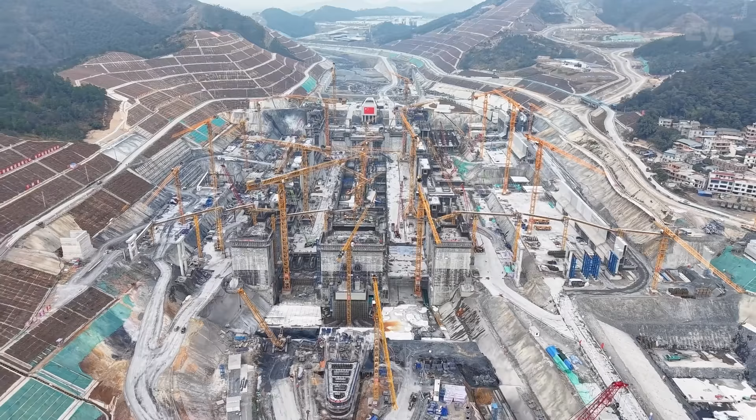So how is China defining the next century of human progress? While the US is still fixing highways from the last century, China is already exploring the ultimate future of infrastructure. China continues to overcome world-class engineering challenges through innovative techniques and advanced construction methods, earning it the moniker 'infrastructure maniac.'

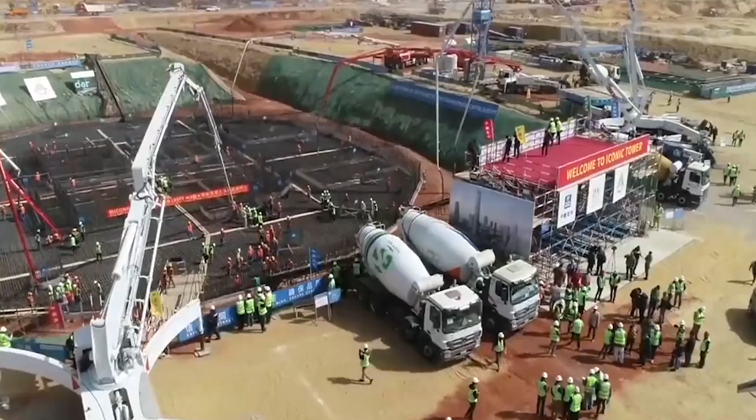And yet, this is not the end for China. In the future, the infrastructure maniac will continue to help more developing countries modernize, create new opportunities for development, and build a better, more livable world for all.

Each bridge, every road, and every project connects cities and countrysides, the present and the future, China and the world. Chinese infrastructure has not only reshaped the face of China, but also exemplified the strength, spirit, and speed of the nation. The infrastructure maniac will never stop.